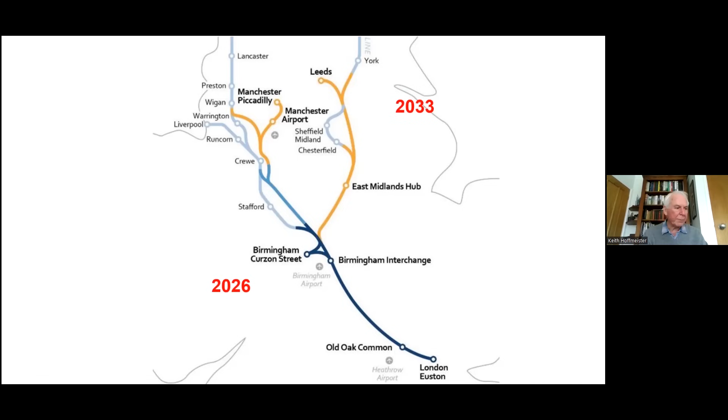In 2019, HS2 confirmed that the project would be delayed by up to 7 years. Phase 1 would now be completed sometime between 2028 and 2033. Phase 2A sometime between 2030 and 2034. Phase 2B, the western leg from Crewe to Manchester, 2035 to 2041. The eastern leg to Leeds was subsequently cancelled in 2021.

Following further delays and cancellations, a term we're all too familiar with on railways, of course, albeit ones that are usually actually running, the Prime Minister, Rishi Sunak, announced at the 2023 Tory party conference that the route beyond Birmingham would be scrapped altogether. He said facts around HS2 have changed, costs have increased, delivery has been delayed, and the pandemic has changed the travel patterns HS2 was originally designed to serve. It will still reach Euston, though, eventually, perhaps.

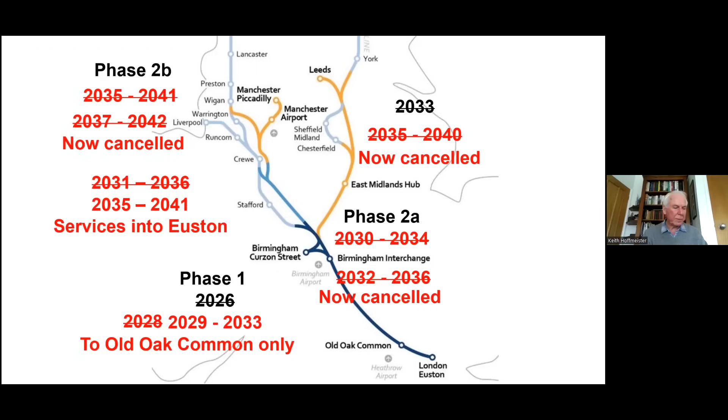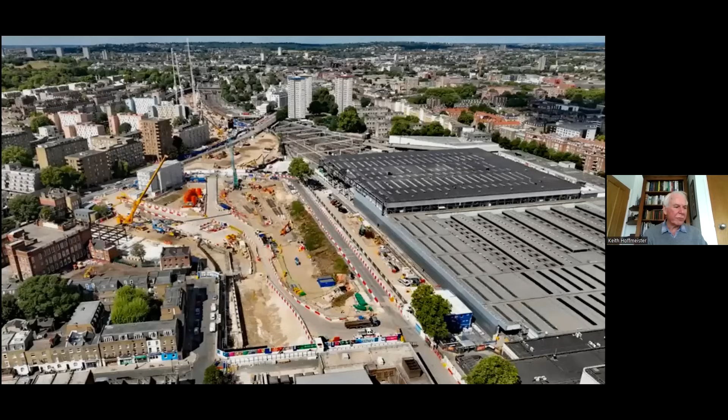In his 6-monthly report to Parliament for November 2023, Transport Minister Huw Merriman stated that an updated delivery into service range for services to Euston will be provided in due course. Euston will now have just 6 platforms instead of the originally planned 11, and possibly running only 8 trains an hour rather than the planned 17 in peak times. As I said, unbelievably, no decision has been made on the train service that will run once HS2 is operational.

The government stated that there must be some accountability for the mismanagement of the project, and so HS2 will no longer be responsible for the Euston site. Instead, the government are looking to appoint a property development company separate from HS2 Limited to manage the delivery of the project. I try not to comment on such things, but I have to say what an absolutely damning indictment of HS2's management of the scheme this is, and we're all paying a high price for it.

The updated cost estimate for phase 1 is 49 to 57 billion pounds at 2019 prices. This is, of course, just for the route from Euston to Birmingham and onto the Handsacre Junction, where it will link to the West Coast Main Line. This is a very significant increase on HS2's previous projections and is nearly double the original cost of the whole project.

HS2 will approach the Chilterns via the 2.1 mile long Colne Valley Viaduct across the Colne Valley Regional Park near Denham. This will be the longest viaduct in the UK, yet it will take trains just 40 seconds to cross it. This is looking across Harefield number 2 Lake towards the south abutment. This is actually in Hillingdon. The viaduct is supported by 56 piers between spans that are up to 80 metres long.

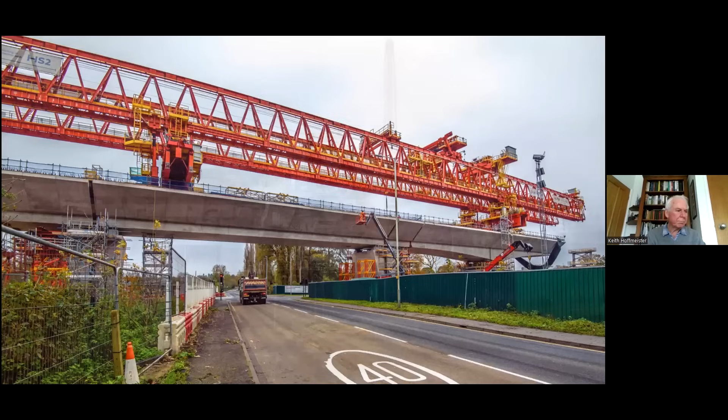Next is the Grand Union Canal, and here we can see the launching girder working its way across Savay Lake. The canal will be closed for 5 weeks from February the 1st to allow the launching girder to build the section across the canal and the towpath. The launching girder weighs 700 tons and moves methodically from one pier to the next. Each precast deck segment weighs up to 140 tons, and they are installed on each side of the pier in turn to maintain a balance.

This shows the viaduct crossing the Moorhall Road and then on across Korda Lake. These are the largest piers which take the viaduct over the lakes and weigh 1,800 tons. Each took 9 months to build and they were all cast on site. Coffer dams were used to hold back the water, while 60-metre deep foundations were built into the bed of the lake. Apparently, the fish were removed from the lake before construction commenced.

This is one of the largest sections being lowered into place. They are glued together with steel tensioning cables threaded through the segments to strengthen the bridge, and you can see the holes where the cables go. You can also see the internal walkway, which will run the length of the viaduct.

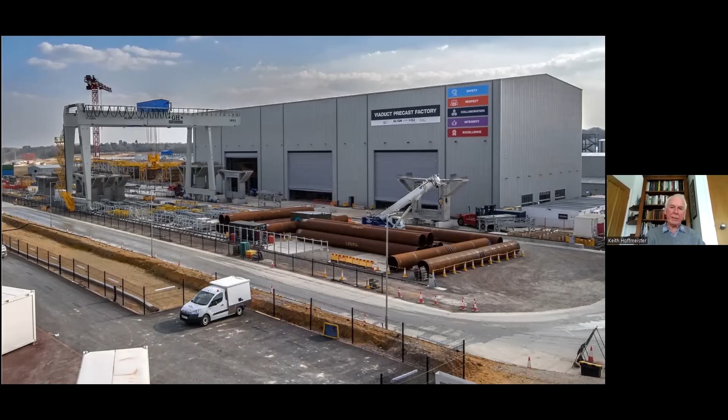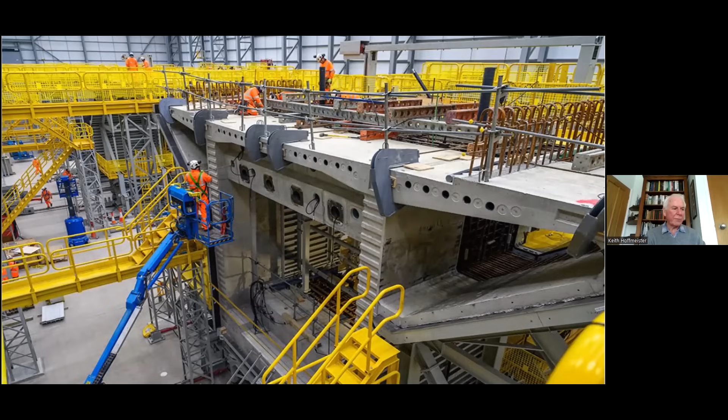The segments are all made on site and transported along the completed sections of the viaduct. The factory used to make them is actually bigger than the Albert Hall. They are currently making 12 each week, and 1,000 will be needed altogether. As the viaduct is on an elongated curve, every segment will be slightly different, depending on where it fits into the viaduct.

Here, the viaduct passes the old clubhouse at the Denham Water Ski Club. A new one was built on the opposite side of the lake. And this is looking back across the lake towards the viaduct. And you can just see the old clubhouse on the other side. I have to say it's an ugly thing, but it's nowhere near as bad as I thought it was going to be.

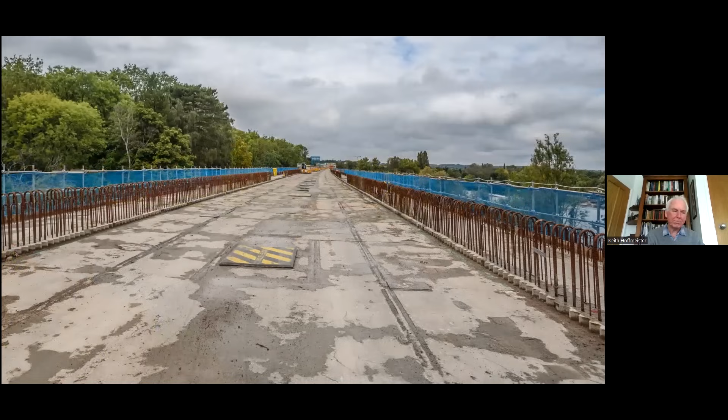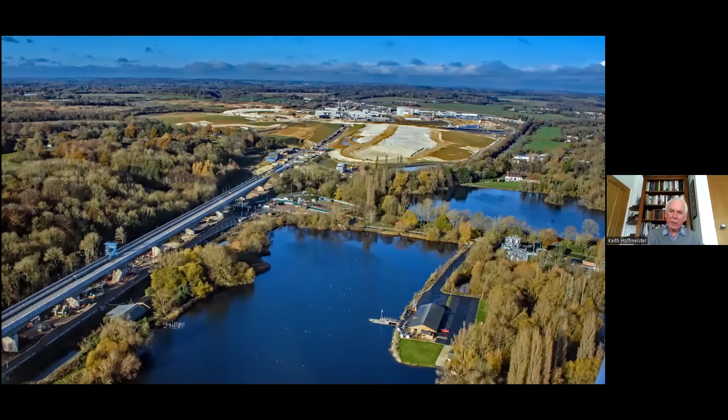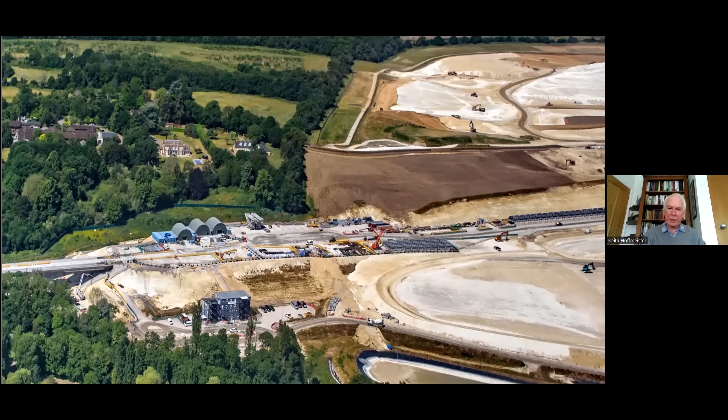Moving on, the route leaves the viaduct just north of the A412 and continues towards the south portal of the Chiltern Tunnel. This is the West Hyde embankment just beyond the 412. These embankments were all made with the treated slurry from the tunnels, as was the landscaping here. This is the Tilehouse Lane cutting, and as I mentioned, a lot of landscaping here using the treated slurry.

This is an impression of the eventual view north from the viaduct across the landscaped area. Called the Colne Valley Western Slopes, it will be over 300 acres of chalk grassland, woodland and wetland habitats. This is the only section of the route in Hertfordshire. As you can see, 65,000 trees and shrubs will be planted here alone.

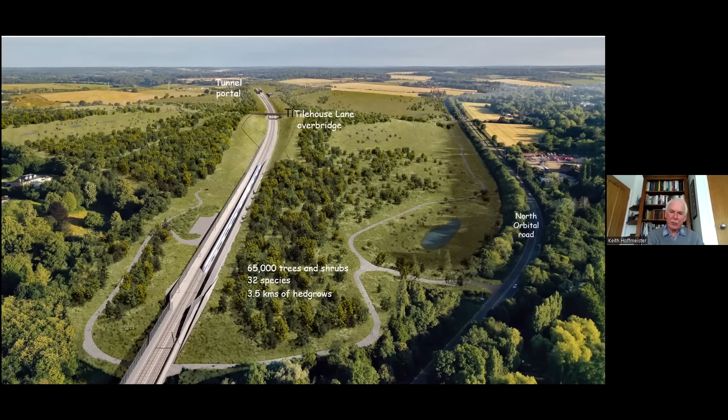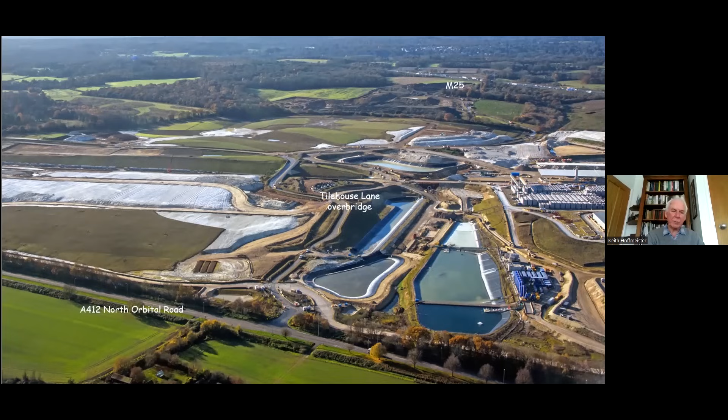Here we're looking across the route from the 412 as the Tilehouse Lane cutting becomes the Chiltern Tunnel south cutting as it approaches the tunnel portal on the right. There are 3 factories on site. Beyond the viaduct segment factory already mentioned is the tunnel lining factory, and beyond that is the slurry treatment plant.

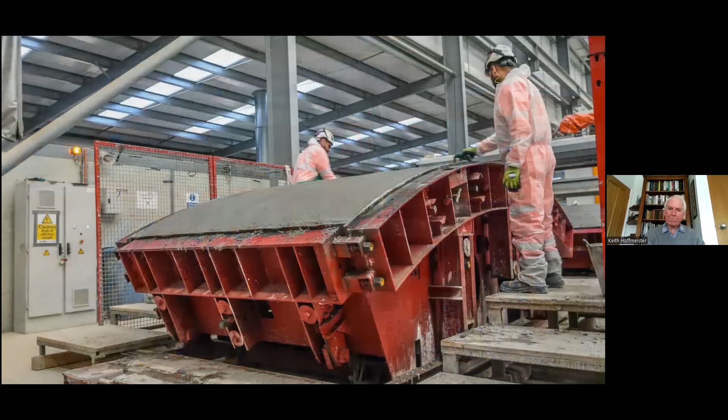112,000 tunnel lining segments were produced here, and the last were made at the end of 2023. So that factory has now been decommissioned. It's done its job. The slurry treatment plant will soon finish its work as well, having treated some 3 million cubic meters of spoil. The demands on the batching plant will also be much reduced. All HGVs arriving at the compound use these temporary slip roads off the M25, keeping them off local roads.

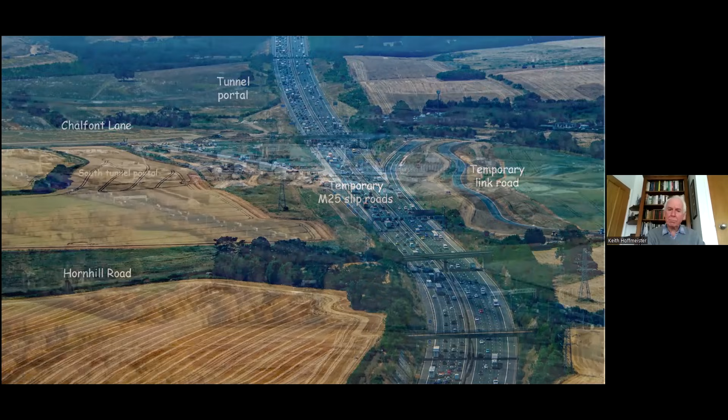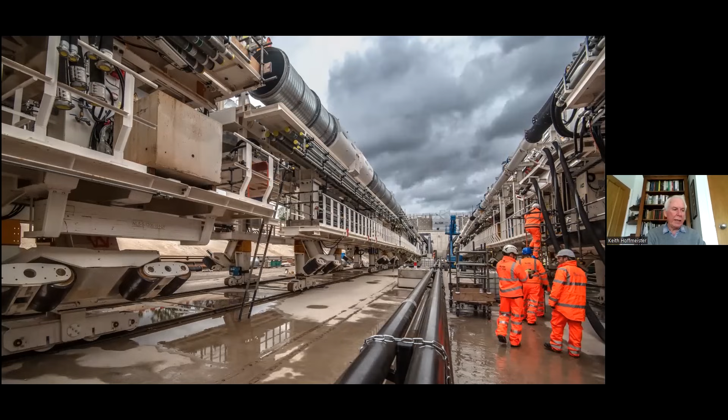The next section of the route is the 10.6-mile long twin-bore Chiltern Tunnel, and the tunnel portal is just south of the M25 between junctions 17 and 16, and you can see it just alongside the motorway. The two tunnel boring machines, TBM, started tunnelling here in May 2021. They will have finished their work by the end of February, but more on this when we get to the North Portal.

This is the actual tunnel portal, the entrance to the tunnels, and you can just see the M25 at the top. It shows how close it is to the M25. Here we can see the construction of the upline porous portal. This is a section at either end of the tunnel which has openings to the outside air. As a train enters the tunnel at one end, it generates a pressure wave, which can produce noise at the other end of the tunnel. The porous portal slows the build-up of the pressure wave in the tunnel, reducing the resultant effect.

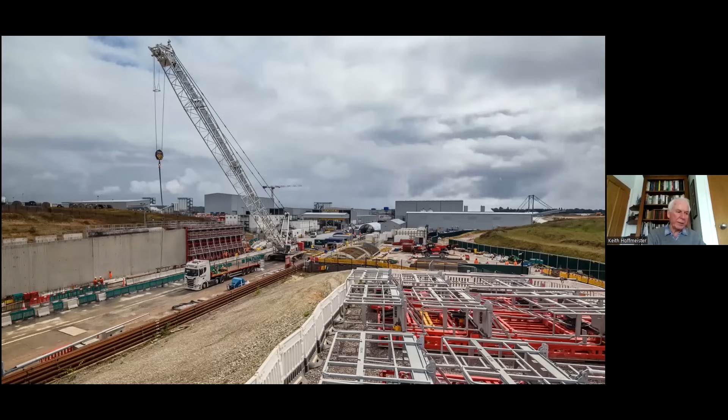And looking back from here along the route, this, as we've mentioned, will be the Chiltern Tunnel South cutting, which trains will come into as they approach the portal. And this is more or less the same view looking back, showing the last crop growing there across a field of barley.

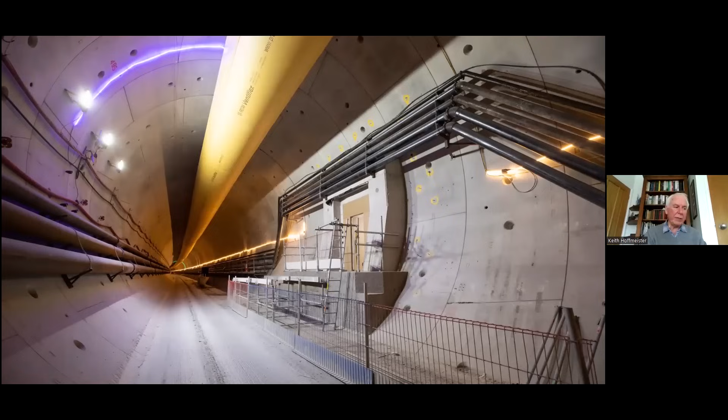This is an HS2 picture showing a section of the completed tunnel. Each one will have a 1 meter wide walkway, which will be used for passenger evacuation in the event of an emergency. There will be cross passages between the tunnels every 320 meters, 38 of them in total. Each will be between 15 and 20 meters long, lined with concrete and finished with a safety door. About a third have been completed so far.

These tunnels are excavated using noisy equipment, which can be heard above ground, particularly when breaking through the tunnel lining sections. This caused some disturbance to some residents for several weeks, initially around the clock, but following complaints, not overnight. This came as a shock as there was no warning, and it was assumed that there would be no further disturbance once the TBMs had passed underneath.

This is the first of the shafts, the Chalfont St Peter vent shaft in Chesham Lane. Construction of all the shafts themselves is now complete. They will all have a head house across the top of the shaft. These will be single story and will be the main building seen on the surface.

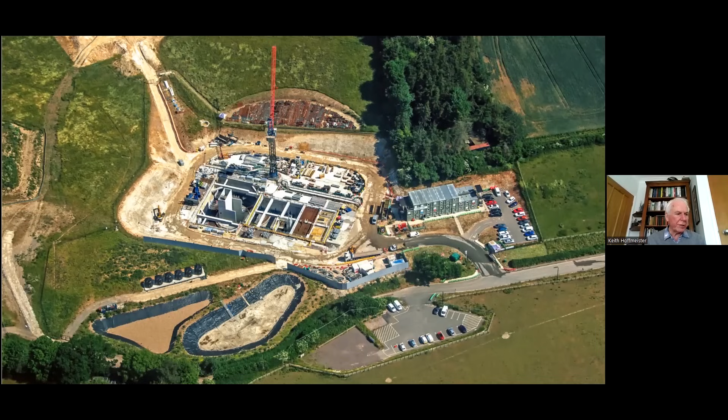Chalfont St Giles vent shaft is situated at the top of Bottom House Farm Lane. Access to the shaft is via a half-mile long temporary haul road from the A413. You can see the top of the shaft and the basement alongside. Bottom House Farm Lane continues in its original form off to the left beyond the vent shaft.

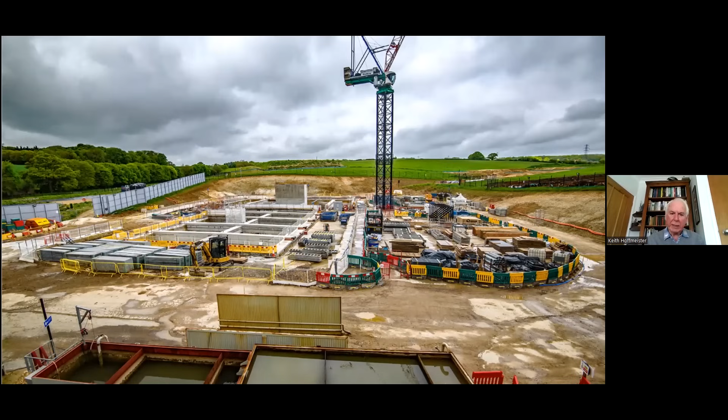The TBMs reached here in September 2022, and this was taken last May and shows the development of the basement. The basement has now been covered and the head house is under construction. This is the top of the shaft, which is 34 metres deep, and the tunnels are 26 metres below the ground, less than half the depth of the Chalfont St Peter shaft.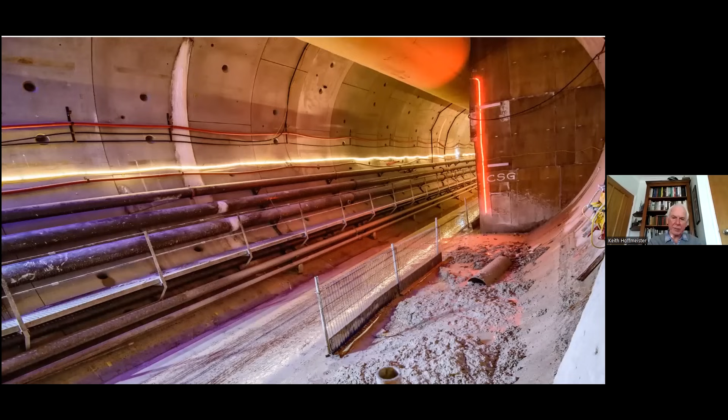This is actually in the tunnel itself, underneath the Chalfont St Giles vent shaft. This is the down tunnel from London, and we're actually looking north. Beyond the partition is the connection from the tunnel directly into the ventilation shafts. The pipes along the wall carry water to the tunnel face and then slurry back to the south portal, 10 miles in each direction at the moment.

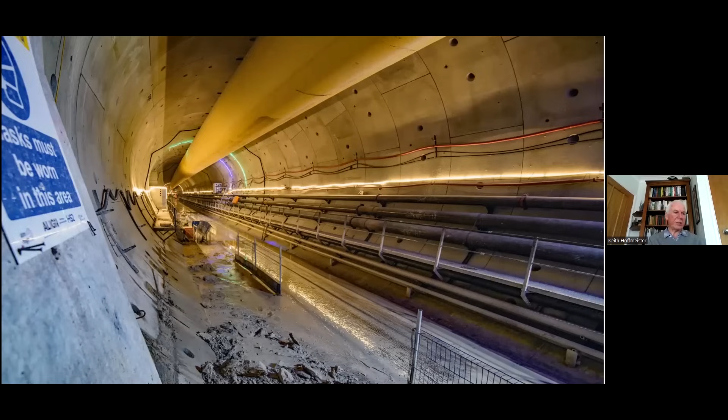And then this is looking back towards Chalfont St Giles. Tunnel ventilation is currently provided via the large tube in the roof. And then it's 108 steps back up again. This is the top of the shaft revealed when the basement is constructed. This is the top of the shaft at basement level once that has been removed.

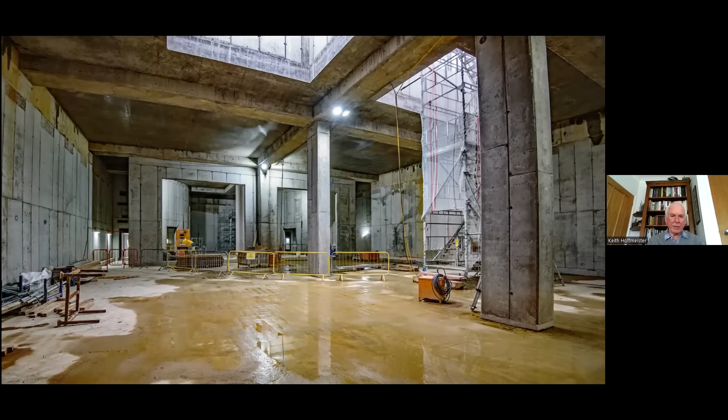And then this is the view looking towards the shaft now. These pictures were taken a couple of weeks ago. This reminds me of the huge turbine halls at the power stations, if any of you have been to the Tate Modern, the large turbine hall there. And this is where the fans will be housed. Air will be extracted and released via these chimneys, and these are housed in this second building seen here above ground.

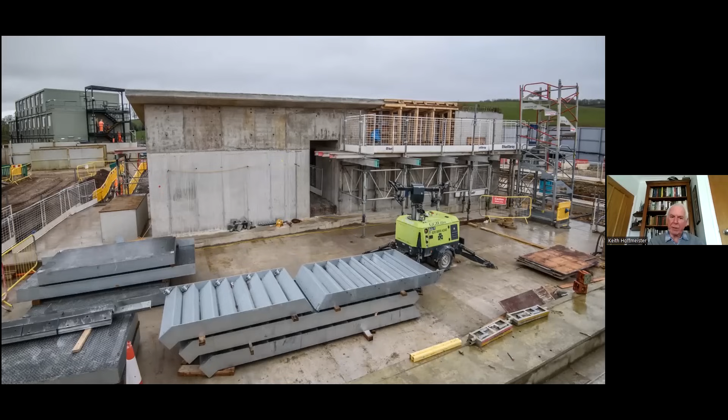The third building will house the auto transformer station, and this is the base prior to construction. And this is an impression of what the whole thing will look like eventually. You can see the head house is the main building, auto transformer station, and then the outlet of the vents in the small building on the right. The haul road here will be removed once construction of the vent shaft is complete.

Bottom House Farm Lane was a narrow single track road, and this is how it was before construction. And this is as it is now. It's been widened and drainage has been installed, but it remains a single track road with passing places. There's been substantial planting here, which has been very successful, and the beginnings of a new hedge now appear on the left-hand side. Bottom House Farm Lane will be reinstated, but it's not been decided yet just how this will be done, as the original approach to the junction was just too steep.

The Amersham vent shaft is situated in Whielden Lane, west of Amersham Hospital. The A404 goes to High Wycombe, and the A413 turns right towards Great Missenden.

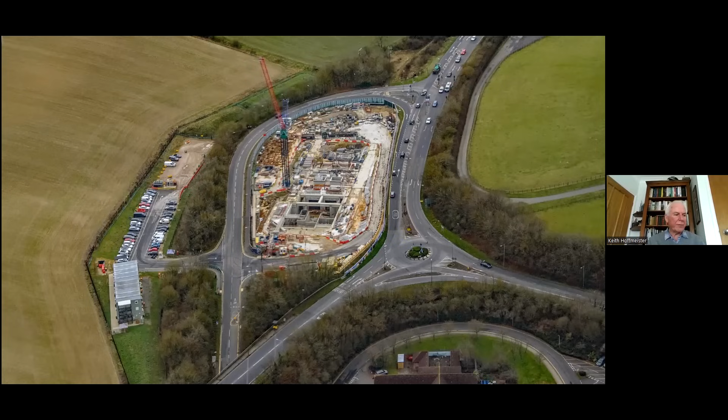Looking west, you can see the A404 joining the A413 alongside the compound. For all the sites between Amersham and Stoke Mandeville, the access route is the A413, the A355 up Gore Hill to Beaconsfield, and then to the M40.

Here you can see the top of the shaft itself. The shaft depth here is 43 metres, and the tunnels are 30 metres below the ground. Construction of the head house here is due to begin in April.

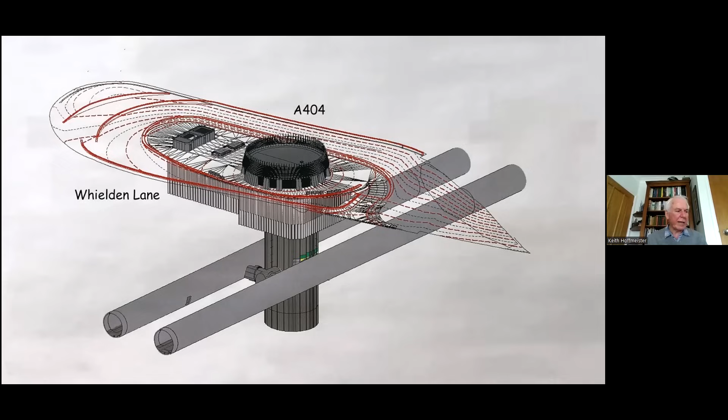This gives an idea of the final layout, with the tunnel straddling the vent shaft, with the head house sitting on the top. You can see the adit which connects the shaft to the tunnels. All the shafts will have a permanent area of hard standing for emergency and service vehicles. Each will be about 550 square metres.

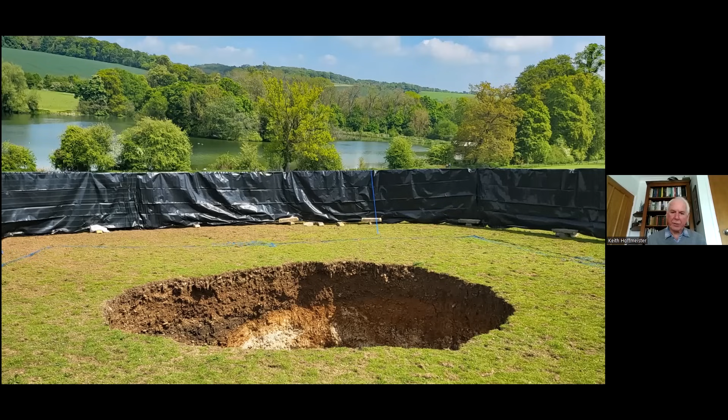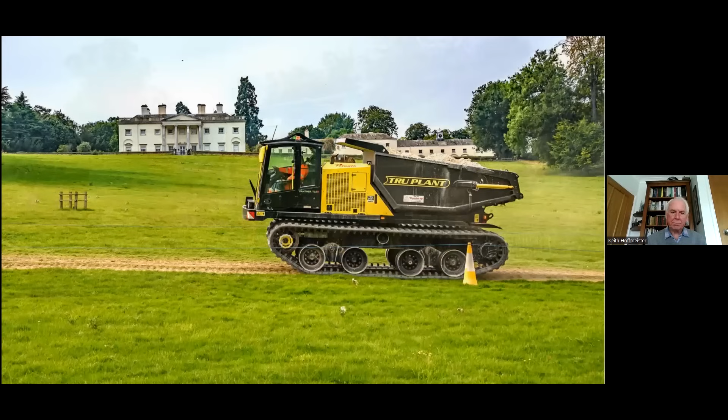The tunnel passes between the 18th century Shardeloes house and Shardeloes Lake. In the last update, I mentioned the sinkhole that had appeared above one of the TBMs just south of Shardeloes Lake. The contractors excavated below the bottom of the hole until competent ground was reached. The area was then backfilled using material previously excavated from the Little Missenden vent shaft. And here you can see it trundling past Shardeloes at the top of the hill.

The ground subsidence occurred 10 metres above groundwater level in superficial deposits and should not have a long-term impact on local groundwater flow paths or the hydrology.

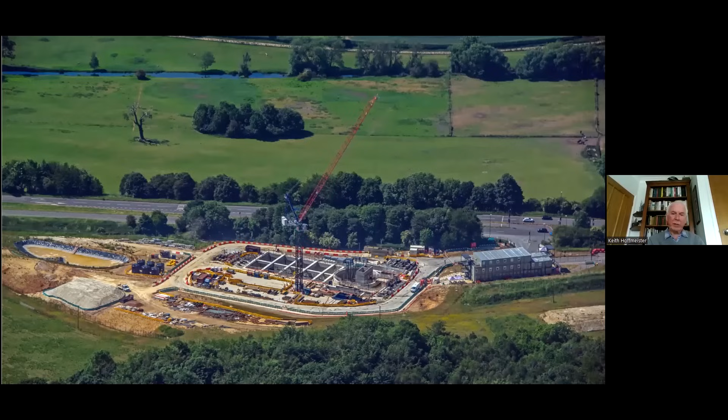The fourth shaft is alongside the A413 in Little Missenden. This is looking west across the vent shaft and the A413, and it shows the close proximity of the River Misbourne, which you can see running across the top of the picture. With much relief, the TBMs passed under the river for the second time without any apparent damage.

The TBMs then set off up the hill towards South Heath, passing under the Chiltern railway line. This will be one of the steepest gradients on the whole rail network. Because of a known geological fault in this area, additional monitoring was put in place.

Last November, as the first TBM passed 18 metres below footpath GMI 27 and the edge of Hedgemore Wood, ground movement was observed, and then a sinkhole appeared. The public bridleway was closed, the area then fenced off, and the livestock removed. The contractors engaged with key stakeholders, including the landowner and Buckinghamshire Council. Remedial works were then completed, and the footpath reopened within 6 weeks.

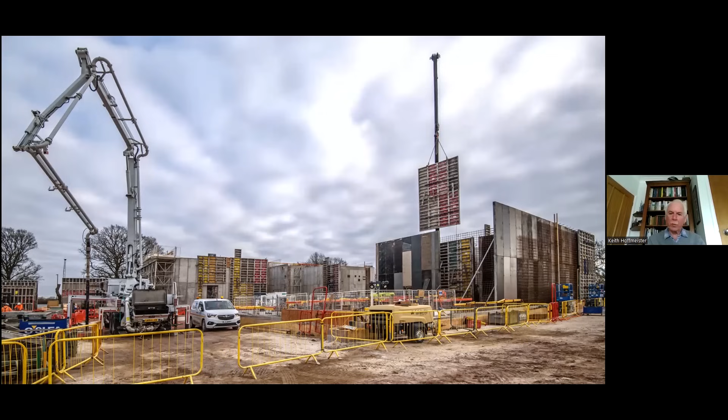And the main work here now is the construction of the head house. As with all the shafts, large shuttering panels are used to form the walls. A framework of reinforcing bars is then put in place and the voids created filled with concrete. There are actually two head houses here, one at each side of the shaft. I don't quite know why they need to be so big, but single storey.

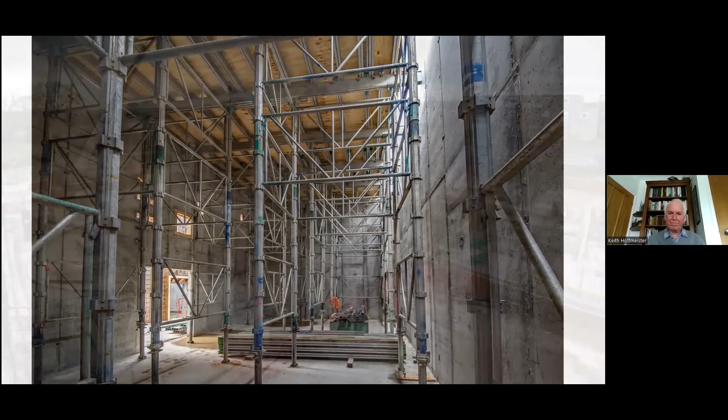This is the top of the shaft itself. Because there are no fans, it is quite simple. A lift shaft is on one side and a staircase the other, with an open space in the middle. The shaft depth here is 46 metres and the tunnels are 33 metres below ground. The TBMs passed here earlier this month.

And here we can see just how close the North Tunnel portal is, which is just over half a mile from the Chesham Road shaft. The TBMs are currently under Sibley's Coppice, which is an ancient woodland. South Heath is on the right, and the Chesham Road from Great Missenden runs across the middle of the picture.

And looking north towards the portal and the South Heath cutting, you can see the extent of the excavation right across the Chilterns. You can see the A413 on the left-hand side of the picture as it goes on towards Wendover.

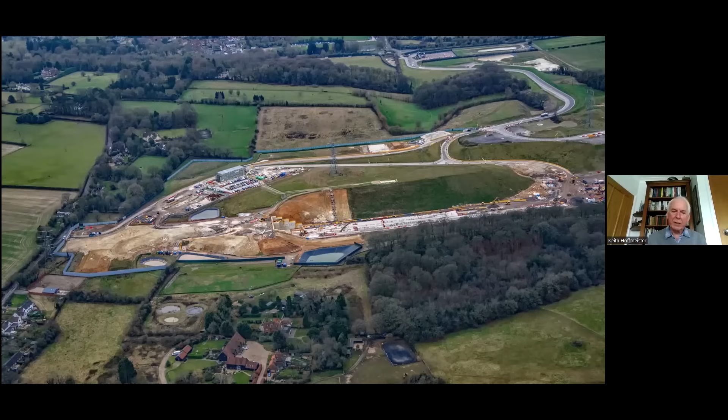Frith Hill will be closed to traffic from 11 a.m. to 1 p.m. for most of February for daily monitoring as the TBMs pass underneath, and then monthly monitoring until the summer. As they approach the North Portal, the TBMs will bore through the 96 pillars that will support the tunnels.

They will exit the tunnels next month and then be dismantled and removed. You can see large concrete blocks that stand in their way. These give the TBMs something to bore through as they need to compress the lining sections as they move forward.

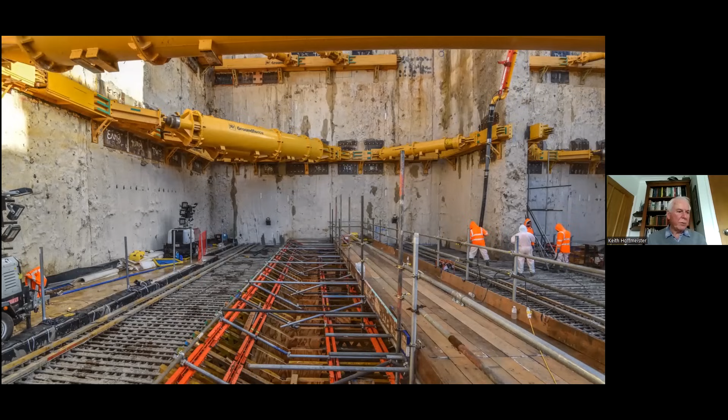They will be dismantled one section at a time as they move forward on this lowered section of the track. I had hoped they would come out all in one go and I had to take some pictures, but just one section at a time. Trains will eventually leave the tunnel here, travelling at 200 miles an hour.

As you can imagine, huge amounts of concrete have been used here, all produced by the batching plant at the South Portal and then transported by road, a round trip for each load of around 40 miles. A batching plant is now under construction just to the north to supply the next section of the route.

A viewing platform has been installed here, which means it's now possible to see the portal without the need for personal protection equipment. This is where the VIPs will watch the first of the TBMs emerge next month.

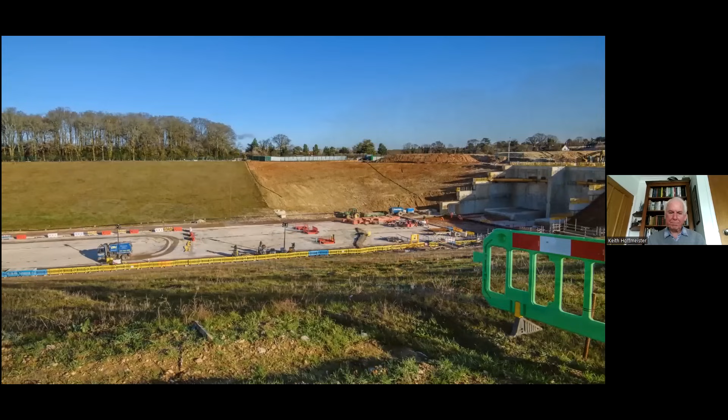Here we are looking east across the South Heath cutting towards Jenkins Wood, more or less along the route of footpath GMI 13, which is closed now, but will eventually be diverted over the portal. The cutting here is about 15 metres deep, and this is the same view taken before construction began and after the last harvest. The overhead power lines were realigned here via a new pylon.

The route continues in a cutting under a series of bridges. In this section, these are all overbridges, meaning that they cross over the railway. The route alignment has been designed to enable speeds up to 225 miles an hour north of the Chiltern Tunnel.

The contractor, as far as the tunnel portal, is Align joint venture. So they made the viaduct and the tunnel. They will now take over some of the sites to the north of the tunnel from EKFB, who are the contractors for the rest of the route across Buckinghamshire.

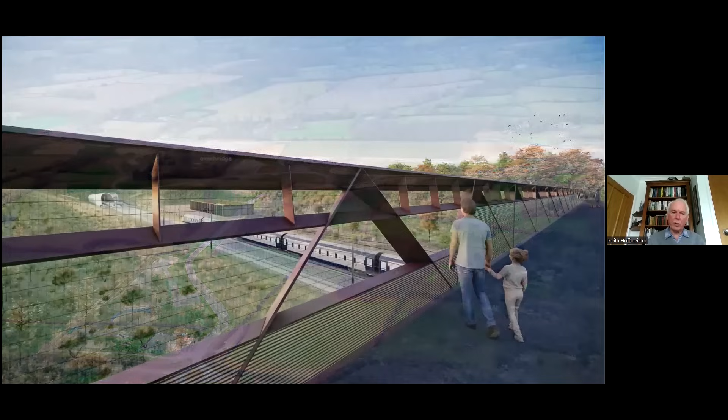The first bridge will take the footpath GMI 12 over the route. Mulberry Park Hill was the first house in the Chilterns to be demolished to make way for construction. Once complete, the bridge will give the only view of the tunnel portal, and this is an artist's impression of what that might look like.

I have to say, this is nowhere near as bad as I imagined when I tramped over this area over the years, because you can't see it. It's all below ground. So you'll only be able to see it from one of the overbridges. That's the only view you will get of it.

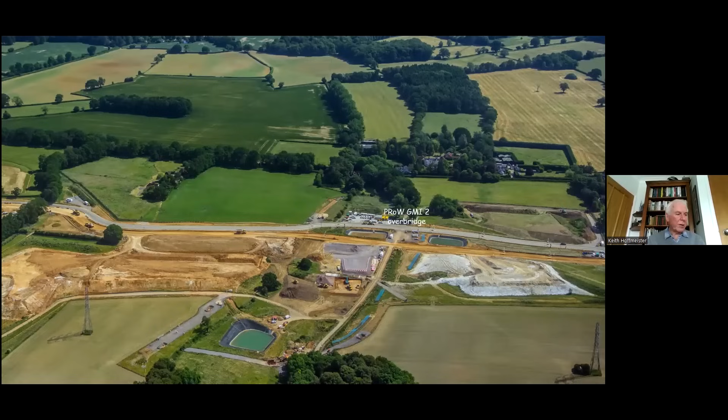This shows the second of the bridges, footpath GMI 2, where construction is underway. This is called an accommodation overbridge, meaning that it will also be used for farming access.

The route then crosses Leather Lane. Offline construction means the bridge will be built to the south of the road, which will then be diverted once construction is complete. 11 large oak trees have been removed so far.

An alternative plan for the overbridge involving the loss of fewer trees has been submitted by EKFB for HS2's approval. As Align have now taken over this site, we have to wait and see if they will proceed with these plans or come up with new ones of their own.

There's also a campaign to save an iconic oak tree, which has been named Ilona, as it stands in the way of a proposed earth bund. As you can see at the moment, it's still standing. This is looking east across the actual route towards the oak trees awaiting their fate.

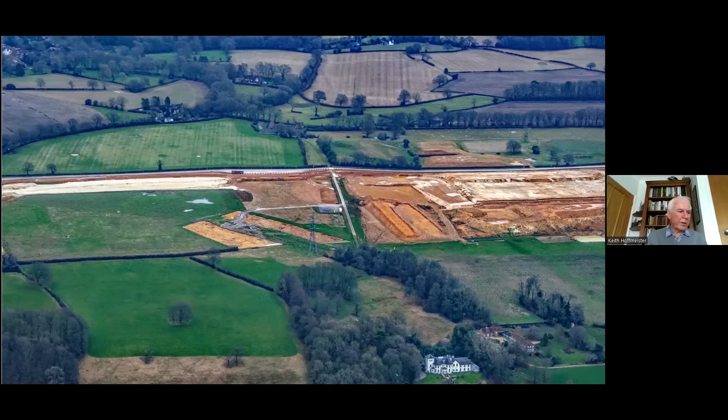Looking beyond Leather Lane, you can see the Iron Age earthworks of Grim's Ditch. Alas, a large section has been destroyed, and sheet piling has been installed to protect what remains. The plan to build Cottage Farm Overbridge nearby has now been abandoned.

The next bridge is another accommodation bridge, taking footpath TLE2 over the route. This is a vital bridge as it gives the farmer access to the west of the route, particularly as they're not going to build the Cottage Farm Overbridge. Bowood Lane Overbridge is a short distance away.

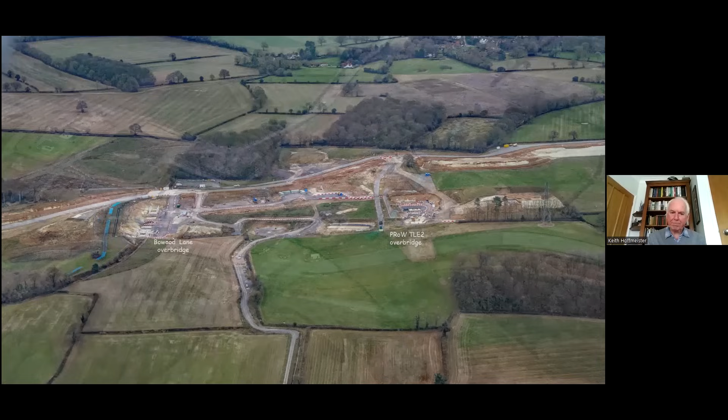The plans for the overbridge were rejected by Buckinghamshire Council. After a lengthy appeals process, the planning inspector rejected the road safety and environmental arguments for carriageway reduction and additional greening, which was proposed by the council, and will now allow a 5.5 metre carriageway, 2 vehicle width on the overbridge, with a 1.5 metre wide verge on either side.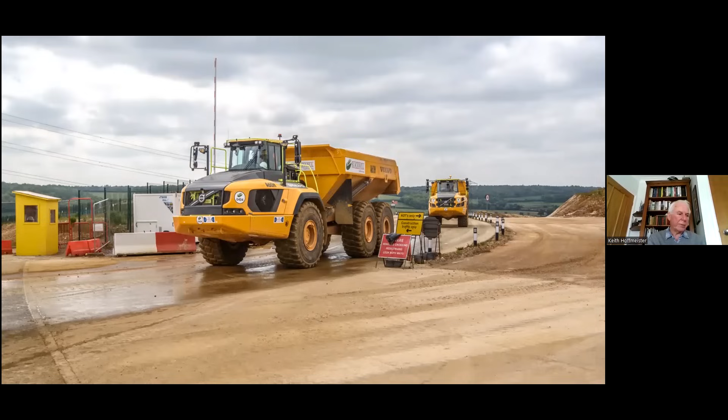The viaduct will be 450 metres long and consists of 10 spans. Each pier needed 6 piles, 2 metres in diameter and 40 metres deep. The need for such deep foundations is that the line is actually on a bend over the viaduct, so they have to cope with large sideways forces.

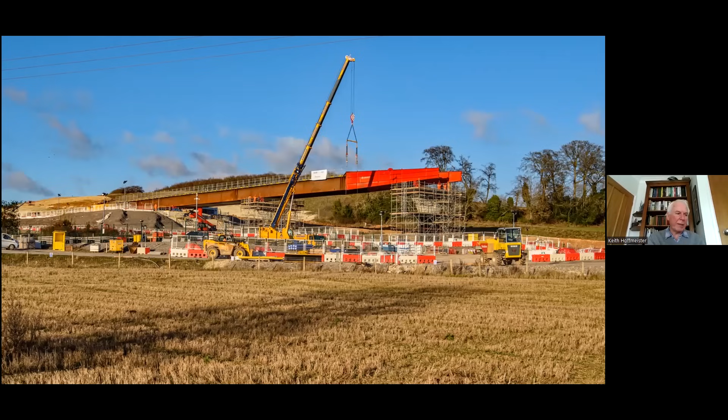The viaduct sections are precast off-site before being transported to the site by road. The first of the 38 steel beams completed their 560-mile journey all the way from France ahead of the start of deck construction. And here you can see the first of the 5 90-metre long spans being pushed out onto the first viaduct. This is an impression of what it will look like. Its maximum height will be 20 metres, and it's designed for trains to travel at 225 miles an hour.

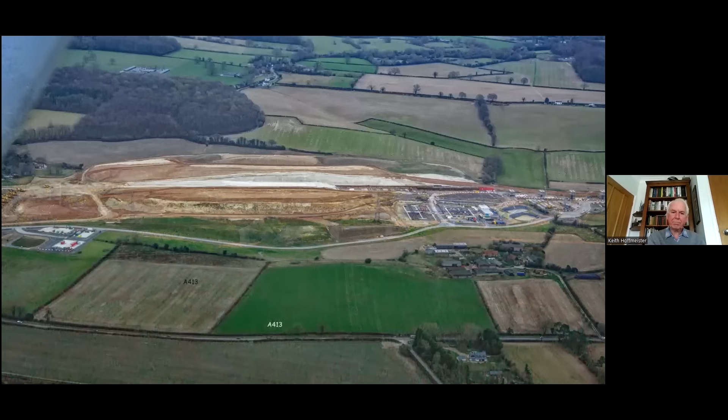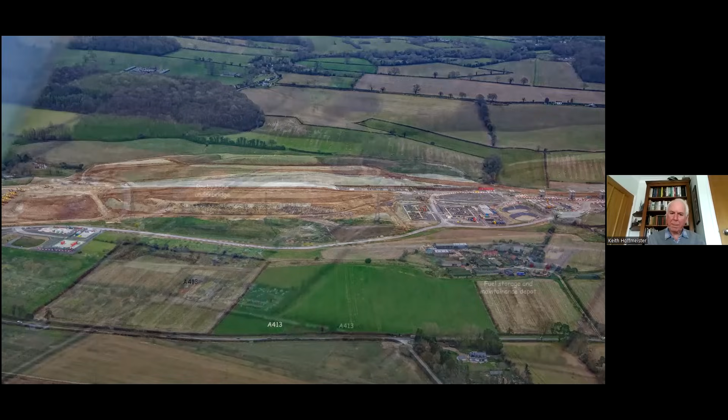The next section is the Rocky Lane cutting. The route here is getting close to the 413, which you can see running along the bottom of the picture, and the work can be seen from the road. The route then crosses Rocky Lane on its way towards Wendover. This will be an underbridge, meaning it will go under the route. There is a fuel storage and maintenance depot alongside the road, the Hall Road, and you can see that to the right-hand side. Offline construction means that this busy lane will remain open while a bridge is constructed just to the north of the lane. The lane will then be realigned under the route.

Beyond Rocky Lane, Small Dean South embankment leads onto the Small Dean Viaduct. This will take the route over the 413 just before the Wendover bypass. The viaduct will be 340 metres long and take 2 years to build. It will take the route over the 413, the Chiltern Railway and Small Dean Lane. The northern end will be near the roundabout at the end of the Wendover bypass.

A fully enclosed 600-metre long conveyor system has been built to remove the stored spoil from earlier earthworks across the A413, the railway and Small Dean Lane. Once fully operational, it will move an estimated 1.4 million tonnes of materials. It's expected to save some 400 HGV movements a day over a 3.5-year period. This conveyor system can be seen just as you approach Wendover. You can see an enclosed bridge. A lot of people think it's a pedestrian bridge, but that's not what it is. It's a conveyor system.

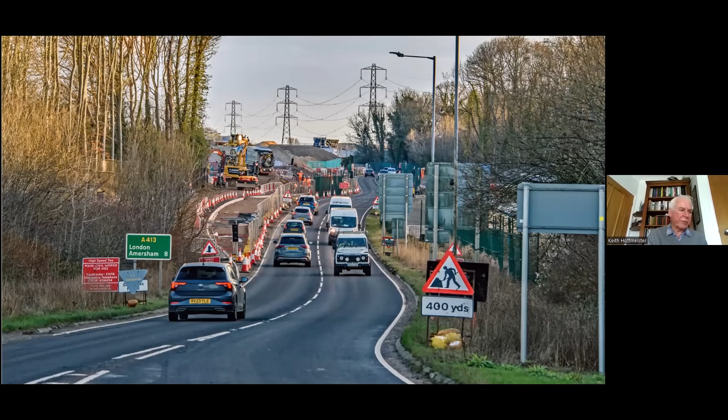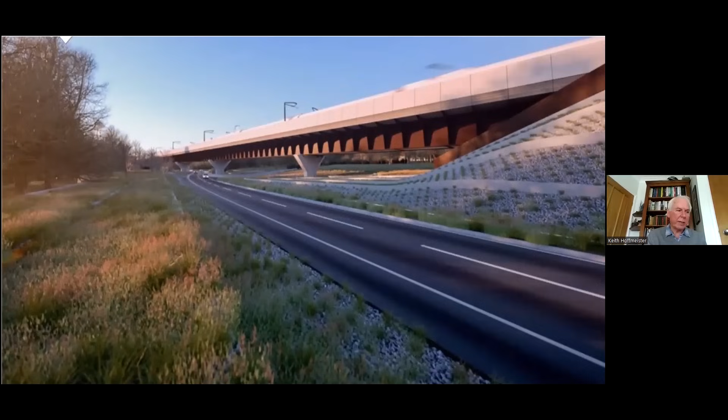The A413 has been realigned slightly to allow construction of two of the viaduct piers. And here you can see before it's tied in on the left-hand side of the road. This is an artist's impression of what the viaduct might look like. The underside of the viaduct will be just 6 metres above the road, and it will be supported by 5 Y-shaped piers. There'll also be noise barriers along the top of the viaduct, so there won't be much of a view from the trains.

The route continues on the Small Dean North embankment up to 14 metres high, and runs alongside the Wendover bypass. Grove Farm Underbridge will take the farm access road under the railway, and this will actually be the last bridge in the Chilterns. The route then enters the cut and cover Wendover Green Tunnel alongside Bacombe Lane. Bacombe Lane will be closed for 2 years, and a temporary link road will connect through to Ellesborough Road. This can't be built until a high voltage cable has been moved. The contractors hope that this will be later this year.

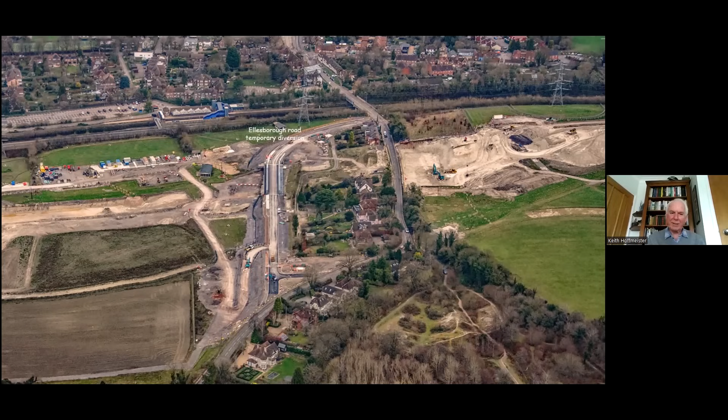Ellesborough Road will be diverted behind the remaining houses during construction of the tunnel, and this is due to open next month. Here we're looking east, and you can see Wendover Station and the Chiltern Railway near the top of the picture. Rather sadly, the cricket clubhouse has been left there, no longer being used.

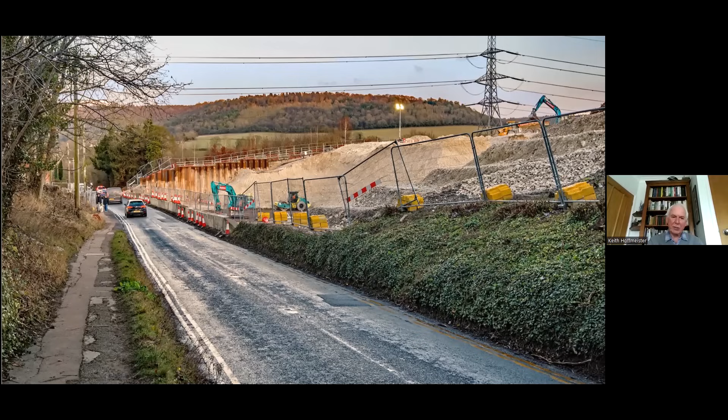Excavations have now started here, and we're looking east towards Wendover. And once the diversion is open, the road will be closed and reopened when the tunnel is completed. So this is just on the other side of the road; the left-hand side of the picture is where the 6 houses were demolished in Ellesborough Road.

And here we're looking west. The sheet piling has been installed to protect the Wendover Memorial woodland. On the right, you can see the bridge that takes the diversion over the tunnel.

Thames Water have pointed out to EKFB that the eastern end of their new road bridge will be too low to allow sewage to flow to the A413 Chiltern Railway Bridge. Rather than building a sewage pumping station, EKFB concluded that the best solution was to build a second bridge to allow the diverted pipe to remain at the existing road altitude, Ellesborough Road altitude. Again, I make no comment, and I thank Murray Cook for that update.

There will be temporary closures of Ellesborough Road to allow the tie-in to be completed. And once the diversion is open, traffic will turn left here. And this is a view down the diversion.

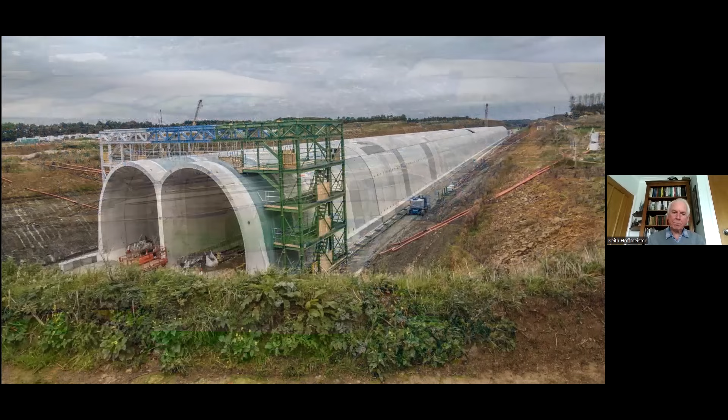Wendover Tunnel will be 3/4 of a mile long. It will be built by excavating a cutting in the ground, forming a tunnel box from precast segments, and then covering it over with landscaping. This is what construction of a cut and cover tunnel looks like. This is actually the Chipping Warden Tunnel in Northamptonshire. EKFB will continue with the cutting part, and Align will then take over and complete the construction process.

The North Portal will be just north of Folly Bridge. That's the last of the bridges across the Wendover bypass. There are serious concerns that construction would interfere with the flow of water into the Wendover arm of the Grand Union Canal and Weston Turville Reservoir SSSI Nature Reserve, diverting it towards Stoke Mandeville and possibly increasing the flood risk.

Clive Johnson of the Wendover Canal Trust informs me that we are now reassured by EKFB that the catchment area for the Wendover Canal is largely unaffected because it is mainly to the south of Wendover where HS2 is on a viaduct. As the tunnel is above the water table, it will be dry inside. The Wendover North cutting will be encapsulated so that water in the aquifers will find its way underneath.

If anything, the flow to the canal might slightly increase because water which currently drains towards Weston Turville Reservoir will be slightly displaced towards the canal. Whilst this is reassuring, questions still remain.

As I've said, the approved access route for all the sites from Amersham to Stoke Mandeville is via the M40 to Beaconsfield, A355 to Amersham, and then the A413 north towards Wendover. These are the latest figures I have, and they're a bit out of date. They're actually September, October last year. Forecast daily HGV numbers travelling along the A413 Amersham bypass and up Gore Hill in October was 372. 372 HGVs per day in each direction.